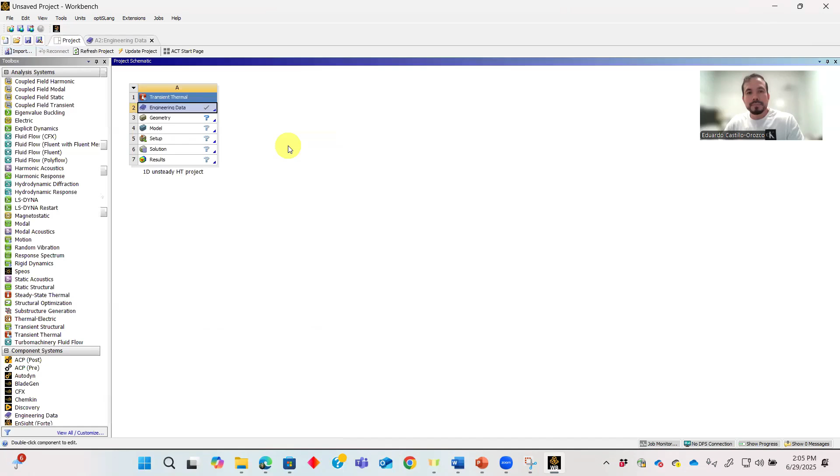Here in my project, I will come to geometry. If I right click on geometry, I find I can either use Space Claim or Design Modeler to create my geometry. By default it takes Space Claim, but I want to use Design Modeler for this problem since the previous video also uses Design Modeler.

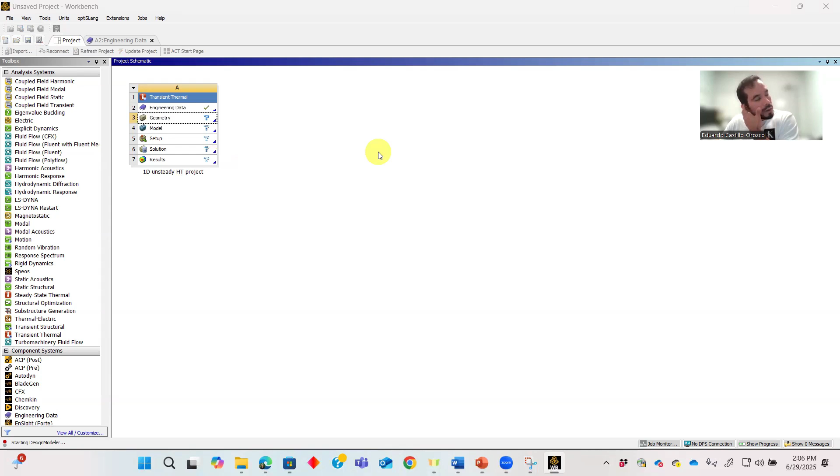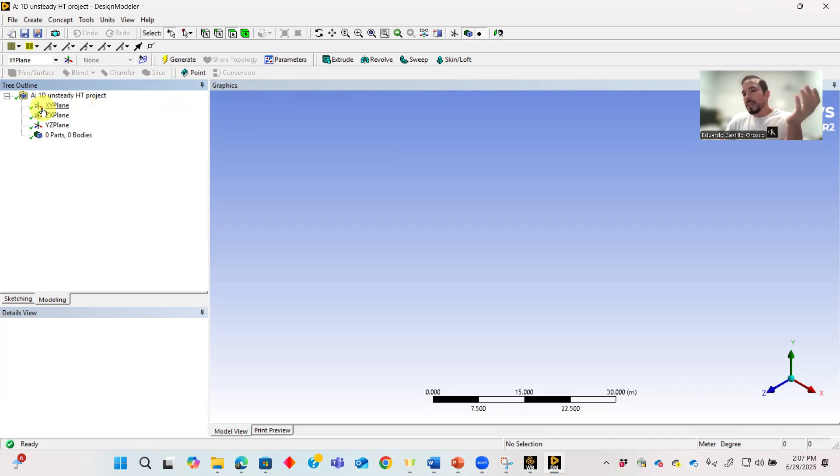We will mesh it in such a way that we only have one element on the YZ plane, and the discretization or addition of more elements only happens on the X direction. So I will come to the YX plane, this plane, and in this plane I want to sketch or draw a rectangle.

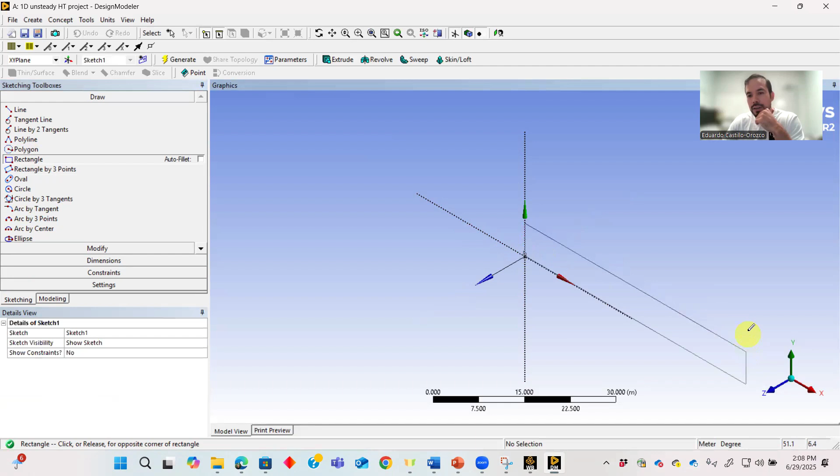So my rectangle will be... let me come back again to XY, I need this axis, XY. And I will sketch a rectangle that will start here and prolong like this. And I will give some dimensions to this. Dimensions can be horizontal or vertical, or simply if I pick general it'll pick the right kind of dimension.

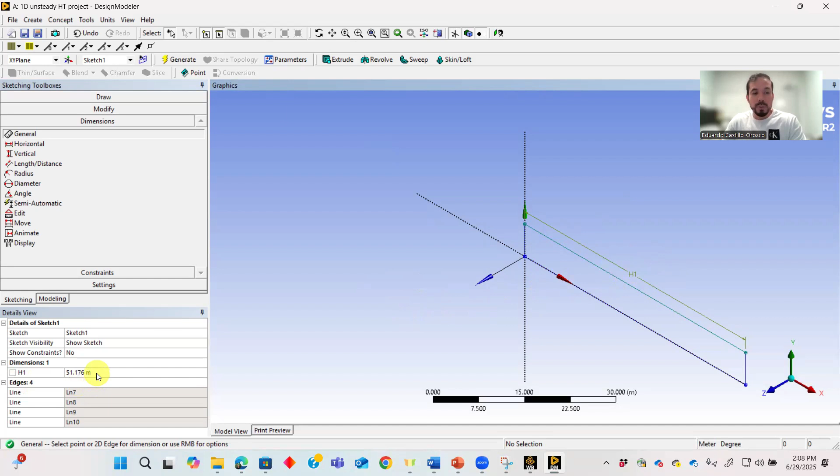So if I click here, it'll create some new variable equal to h1. Now this h1 is 51.176 meters. I can make it 1 meter because we want x to go from 0 to 1. So this will be 1.

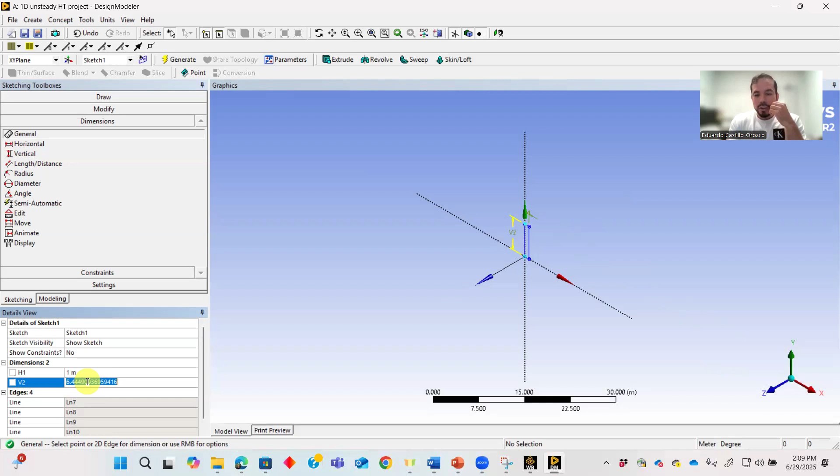And I can also create a new dimension for this vertical line. For this problem, let's create 20 elements. So if I have 20 elements along the x-axis, it means my delta x will be equal to 5 centimeters, and I will use the same 5 centimeters for the height. So that would be 0.05.

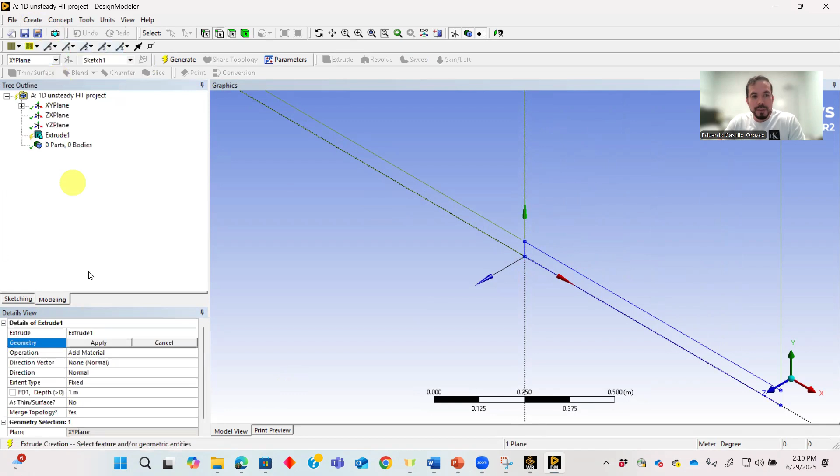And I want to extrude this the same 5 centimeters. So after defining the dimensions, I will come to modeling, create, extrude. I want to extrude this sketch, so I will select it and click apply. The depth of extrusion will be 0.05. Now I can click generate and it will create my 3D geometry.

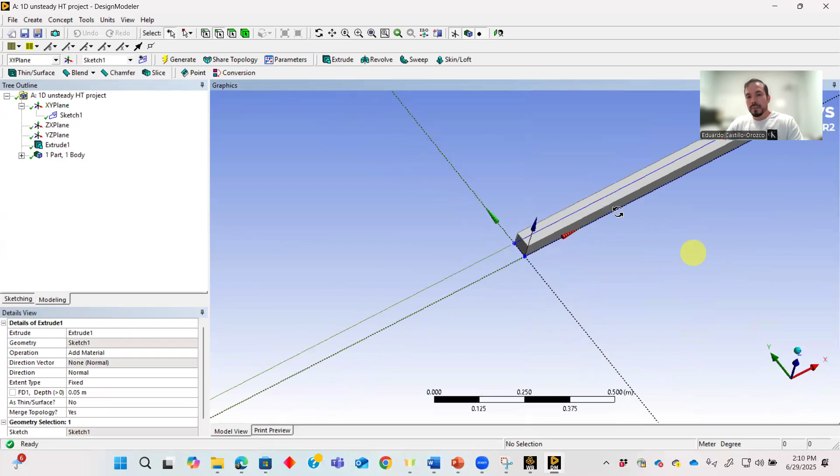Okay, so I'm going to save this project so I don't lose it. If anything happens, I have save project here. And I will save it simply on my desktop so I can find it quickly in the future. And I'll call it project, 1D unsteady heat transfer.

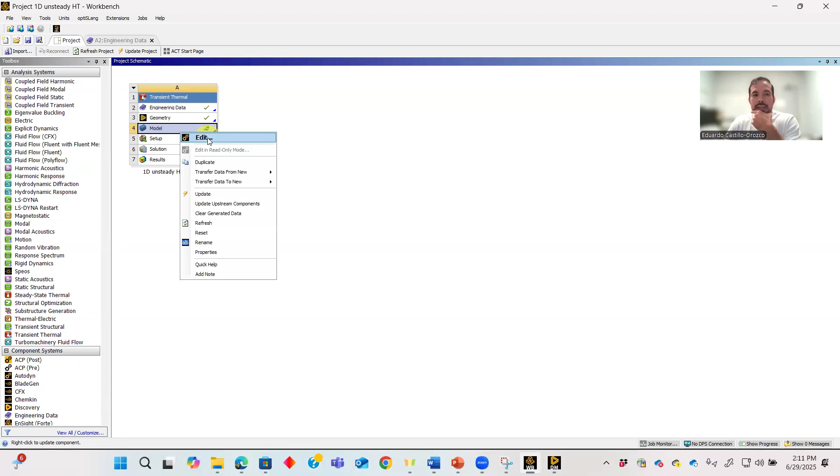Save. Okay, so now I can come to model, right click, edit. It will take some time to load, so we have to be patient. Okay, so now I have my geometry imported into this window.

So I will start checking that I have everything in place. I have here geometry imports, that's fine, geometry. Here solid, my solid has structural steel as material. So I'm going to click here and see the ones I have available.

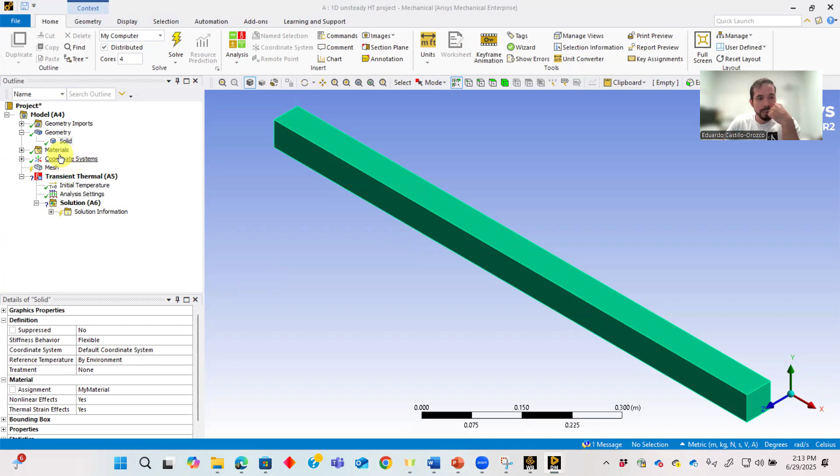So I have structural steel, and if you recall, I also added aluminum and created my material. So I'm going to pick my material. Now it's defined as my material. Now material is there, these are the properties of my material.

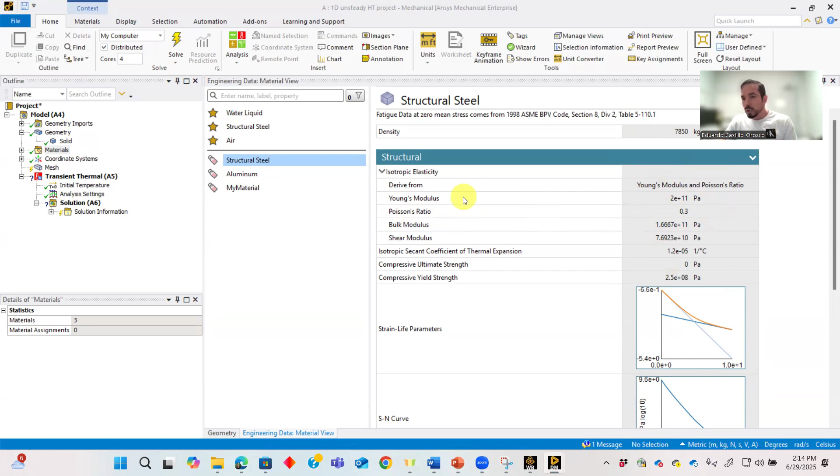I only have density, thermal conductivity, and specific capacity. Now if I go to structural steel or aluminum, I'll see I have much more information, like Young's modulus, Poisson's ratio. But these kind of parameters aren't really necessary for our simulation, so I have simply created the most essential ones we need.

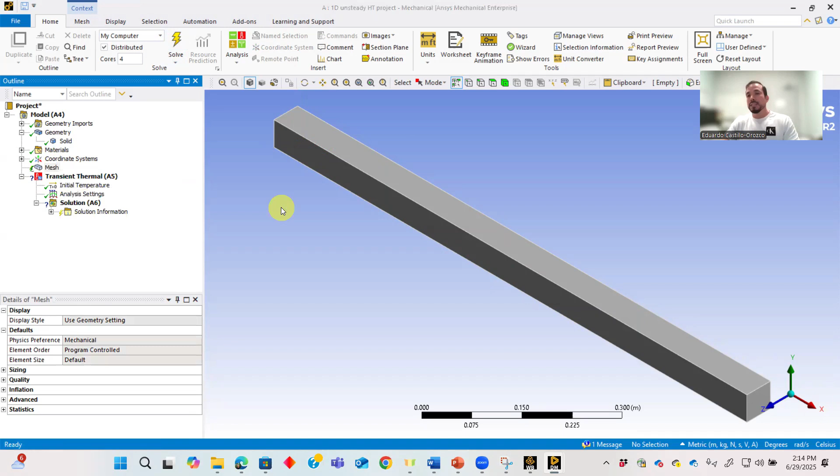Coordinate system, that's fine, that doesn't do anything. And here mesh, I can create my mesh using the default parameters or the automatic mesh to see what we get. So I go to this option, right click on mesh, then generate mesh, and let's see what happens. And we got this, which isn't that bad at all.

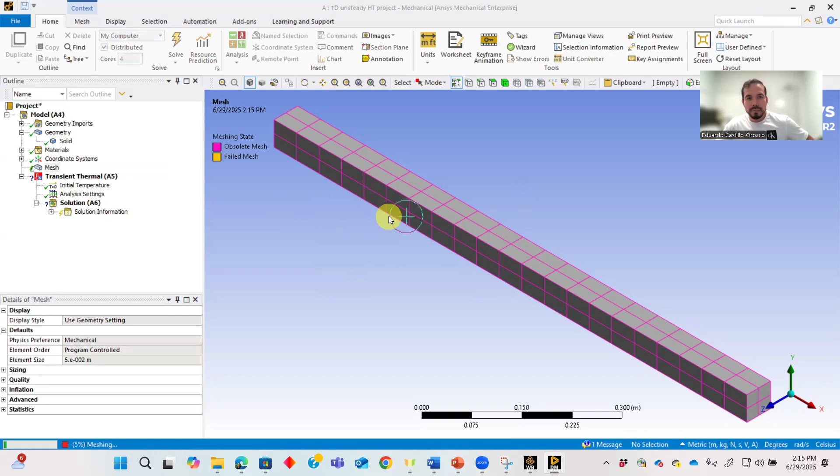So now let's play with the options on mesh. Element size: by default, instead of using the default element size, let's make it 0.05. Okay, then generate mesh. All right, so now I have simply one element across the y-z axis, so temperature won't change.

I will keep the same temperature on the y-z axis, but temperature will change along the x-axis because I have different elements, and therefore I will be able to capture the heat that is flowing along this axis. Okay, so now that I have my mesh, I go to transient thermal.

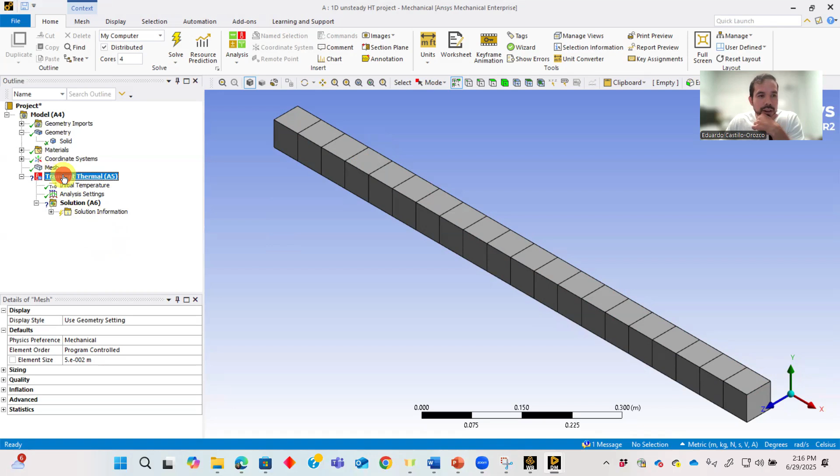Here I got initial temperature, that would be my initial boundary condition. And under initial boundary condition I have 22 degrees Celsius, and I will leave it like that. So that's going to be my cold temperature, TC. And now I have to define my boundary condition.

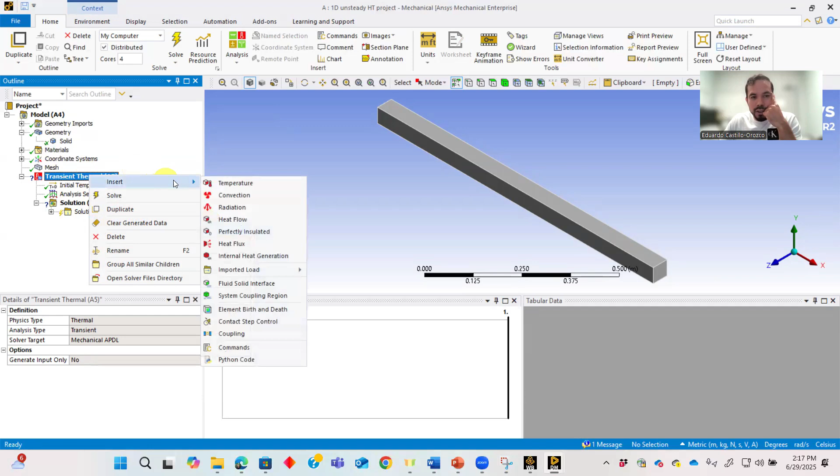So I will come back again to transient thermal. I will right click and pick insert, and I can insert these kinds of boundary conditions: temperature, convection, radiation, heat flow, heat flux. So I will pick temperature, and for temperature it's asking me what geometries. I want to keep constant temperature at the ends, so that will be at x equals 0 and x equals 1.

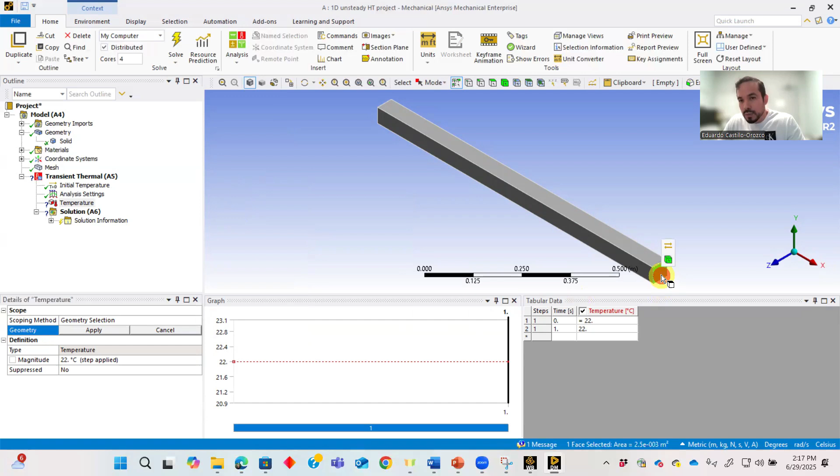So I will pick this one, press Control so I can also select this other face, and select then apply. And the temperature, the magnitude, will be some hot temperature.

Let's make our hot temperature 50 degrees Celsius. So I have 50 degrees Celsius, and that's it. I want to see how temperature changes with respect to time.

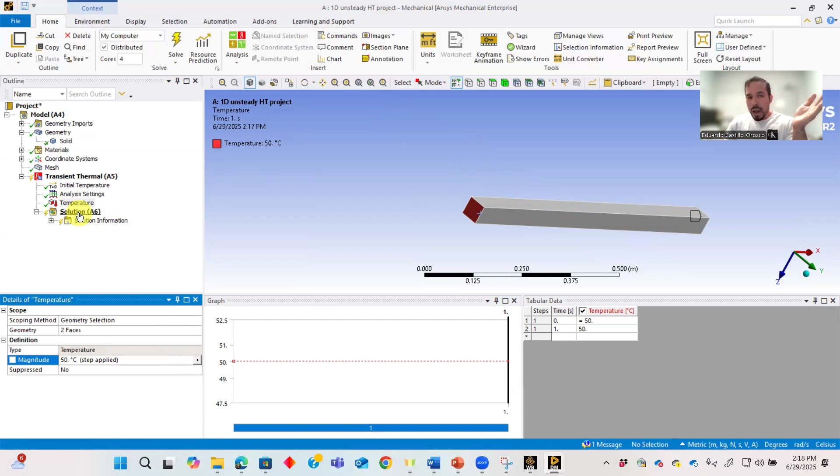Under solution, I can right click and select what I want to monitor or capture. In our case, we are interested in temperature, so I will pick temperature.

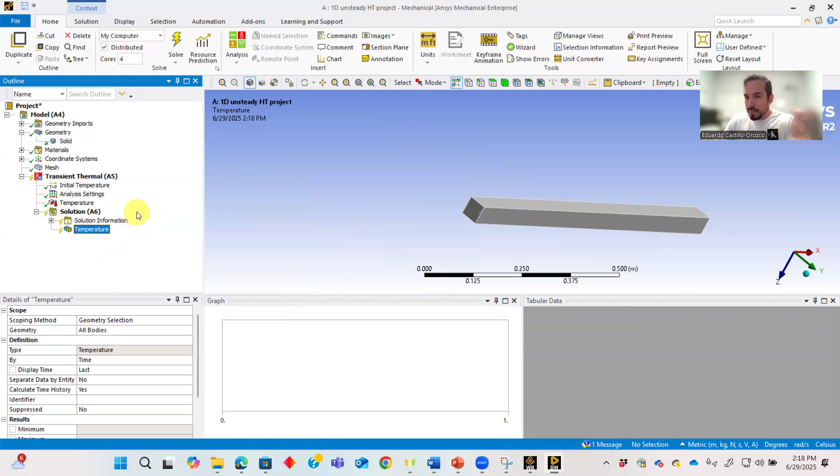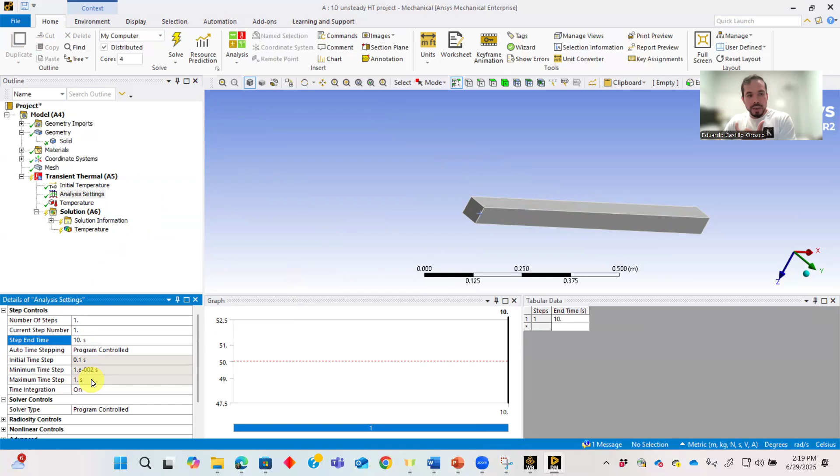Now I only have to take care of the analysis settings, in other words my time step and the duration of the simulation. Coming to analysis settings, I have three parameters: number of steps, current step number, and step end time. My step end time is 1 second, but let's make it 10 seconds to see what happens. When I select 10 seconds, my maximum time step becomes 1 second, meaning at least I will have 10 time steps during that period.

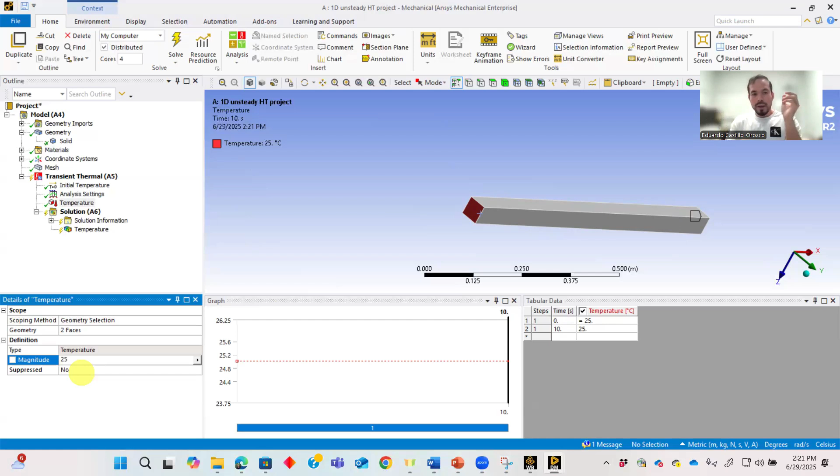Remember the ends are at cold temperature, so it should actually be inversed. My end temperatures have to be 22, or let's make it 25. So our ends are 25 degrees Celsius, and our initial temperature is 50. It starts hot, and the temperature should decrease as time passes.

Solve. Let's check the results. Everything happened so fast that we already reached the steady state solution at a much lower final time.

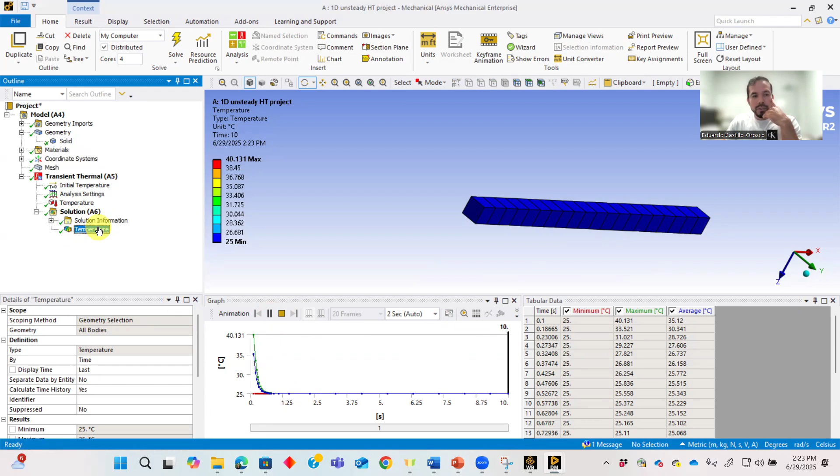So now I'm going to pause this. I will come back to the analysis settings, and instead of assigning 10 seconds for the end time, let's simply say I want this to run for 1 second. Solve.

Now let's check temperature. This looks much better. We can see here that the temperature in the bar starts red.

Let me pause it. Let me place it right here at time 0. Maybe we want to make this maximum time step even smaller so we can capture that. So instead of the simulation being 1 second with a maximum time step of 0.1 second, I will change it.

I have to change this program control to off, so I can modify that and make it 0.01. So that's 100 points. Solve.

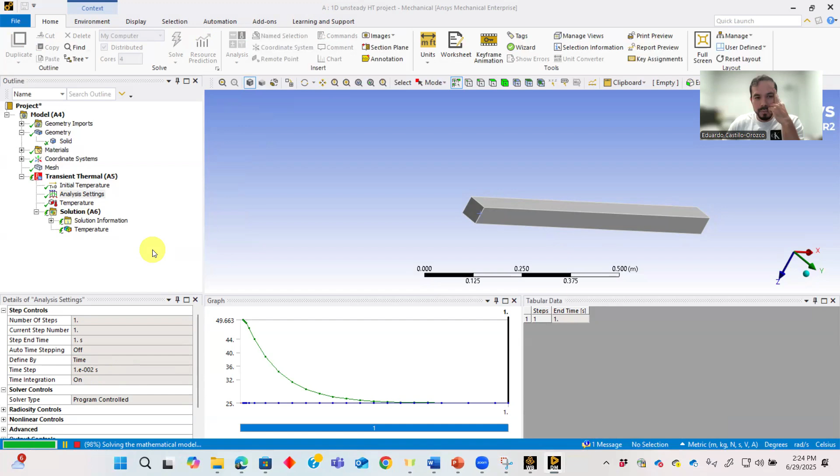Now let's see if I can capture this better. Let's get back. Let me drag this... or if we want to check every single time step, another thing we can do is come to temperature, right click, and pick the option that says create results at all sets.

This should create 100 temperatures. Yes, effectively, I have 100 time steps, so I can check each one. And if I want to see each frame, I come to solution, right click, and evaluate all results, so all of them get evaluated. Temperature 2, here it is because I wanted to get this.

We can see here that this axis is temperature and this axis is time. We're simulating this problem from 0 to 1 second. Here I have three different lines: maximum, minimum, and the average value. And here I also have this table.

When the simulation starts, my minimum temperature is 25, which makes sense because I set the ends at 25, so it would be this end and this other end. The maximum value should be 50 because that was the initial temperature, the initial condition. So everything in red is 50. The average is simply the average of all these different values.

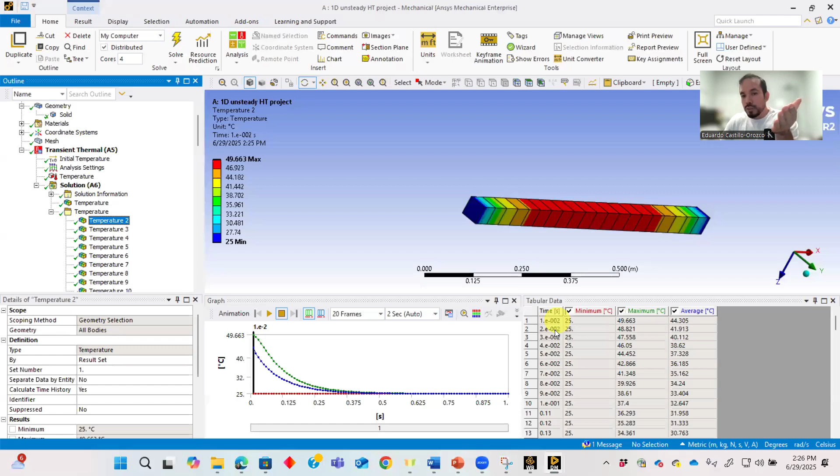As time passes, we can see time steps 1e-2, 2e-2, and so on. The minimum temperature remains constant because we set that as constant, but the maximum temperature starts decreasing.

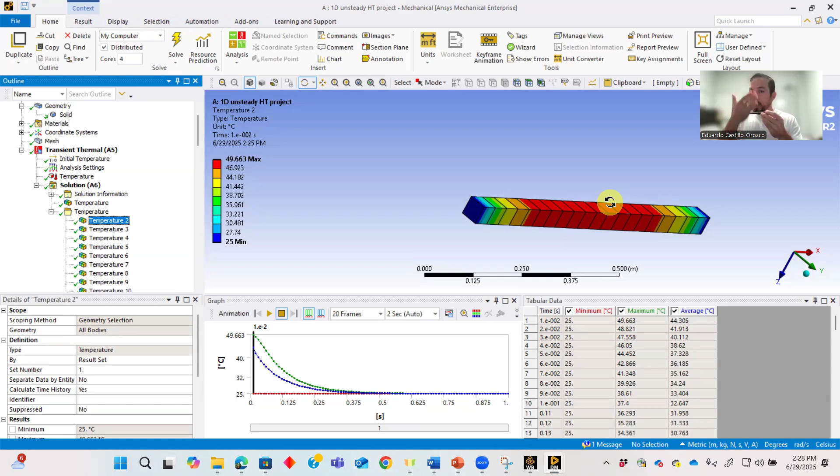Why? Because in the physics of the problem, if I have my bar initiating at 50 degrees Celsius, and I'm keeping these two ends at 25, then conduction heat transfer will make this object find its final steady state, the equilibrium temperature. The equilibrium condition will be 25, so everything has to end up at 25 degrees Celsius. The bar will start cooling down as time passes until the whole bar is at 25 degrees Celsius. And that's what's happening, as time passes we see that actually occurs.

I can pause this and check every single time step. So this is the temperature distribution at the first time step, the third, the fourth, and so on. We see how temperature is decreasing very rapidly, in fact. Then the slope starts flattening, and of course that's the whole simulation.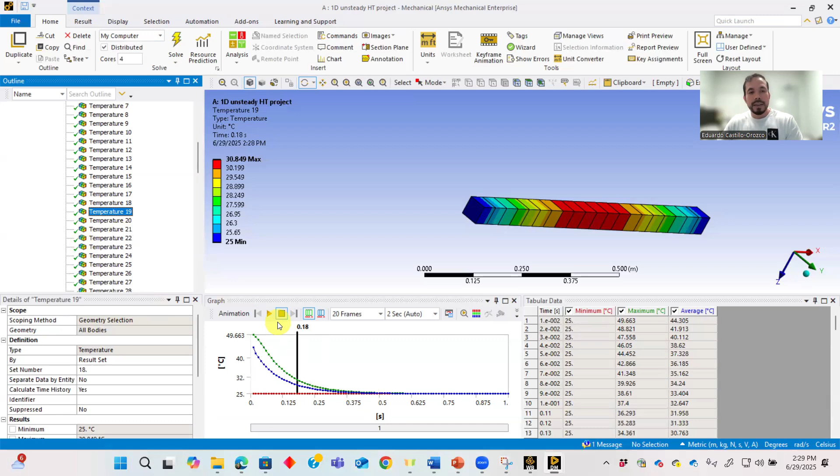Now by the time we get to maybe this point, I believe that would be like 0.65, then the whole bar is at 25 degrees Celsius.

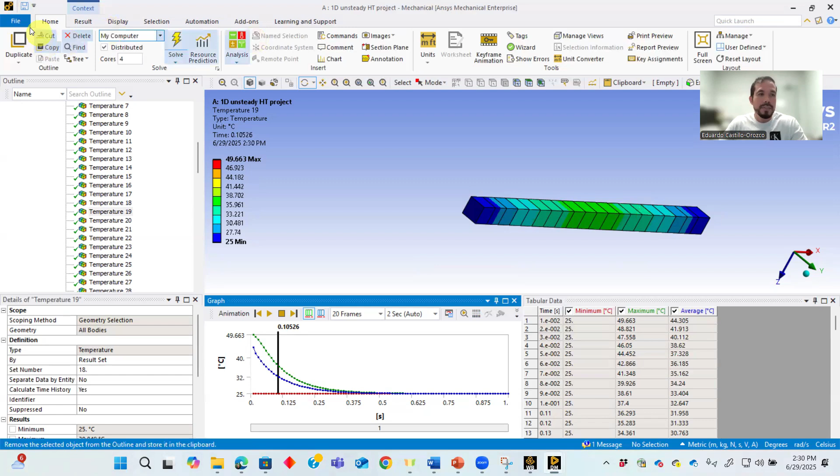Now what you need to do is, since you're going to have to solve this problem on your own, you can obtain data from here, the different temperatures along the x-axis, and then compare that to your own solution. Okay, let's save this now so we don't lose our project.